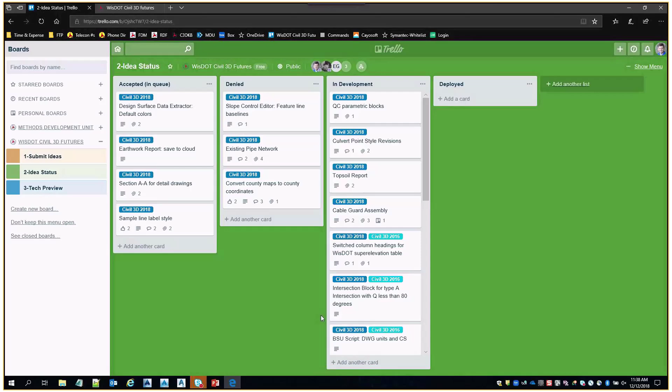The third board is the Tech Preview board. The Tech Preview board is a place for methods development to share previews of certain items under development. This board typically contains larger or more long-term development efforts. WisDOT Civil 3D Futures members can add comments to the cards and watch cards on this board. All other access is restricted, so you can't add cards or move cards.

The Scoping in Queue list contains items that methods development plans to work on soon. The In Development list contains items that methods development is actively working on. And the Validation and Testing list may contain downloads for you to try out if they are available. Each card might contain videos, documents, or test files for you to review. We encourage you to participate and provide feedback by commenting on the cards on the Tech Preview board.

We hope you find WisDOT Civil 3D Futures helpful for communicating with methods development and your fellow Civil 3D users. We encourage everyone to sign up and get started by watching the introductory video.

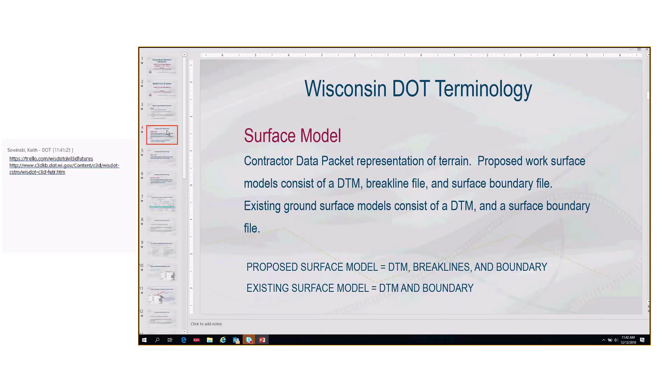For Wisconsin DOT projects and our design models, the term surface model is a representation of terrain in our contractor data packet. Our proposed work surface models contain a DTM, break lines, and a boundary, and our existing ground surface models just have the DTM and boundary.

The reason we don't include break lines with our existing ground surface models: if you've seen our purpose training for design models, you'd know we view our design models as a platform for contractors to build their models from, and it's the break lines that are most useful for them in those efforts. For existing ground, we don't want contractors building off of or changing existing ground. If they've identified any issues, we want them to come back to the department and we'll work out those problems together, so we don't have break lines with existing ground.

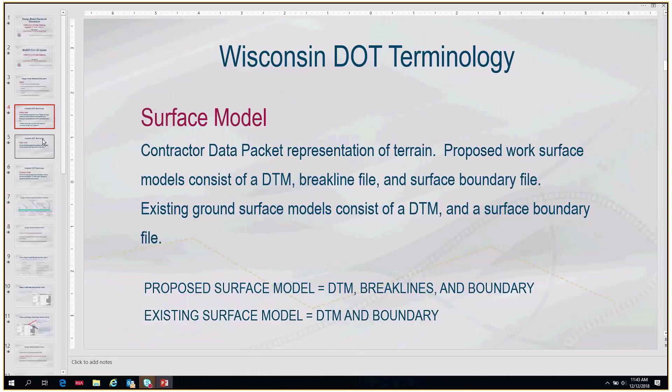The next term, design model, is the proposed work terrain representations in our contractor data packets. Our current delivery requirements have a top and a datum surface model that make up the design model. Datum, if you're not familiar with the term, is the finished earthwork model.

And the construction model is the model our contractors are using in their operations. On our projects, contractors are responsible for construction model development. They may choose to use design model information in developing construction models, or use our design model information as a QC platform to check their construction models. We've seen both of those types of workflows in our project environment.

Our design model implementation is not a new effort. We've been at this for a while, and the design model concept itself has evolved over time. We started out with goals for developing and deploying Civil 3D workflows that delivered what we were calling at the time a 100% construction-ready surface model. That was the original design model concept we started with.

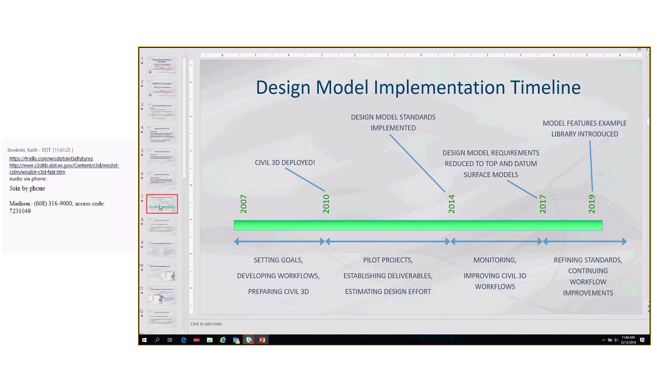But as time went by and we accumulated more project experiences, we started to recognize that the design model concept we started with was maybe not the best, most appropriate use of 3D design practices on our projects. It wasn't a single moment or a single project experience that led us to think that—it was really an accumulation of project experiences over time.

Anytime you're starting something new, you're going to have successes, but you're also going to have projects that maybe didn't meet all their goals, and we were encountering that. As we had conversations with project staff who experienced that, we came to understand that the design model concept we laid out maybe wasn't the best, most appropriate use of 3D design in our project environment.

So if that wasn't the design model for Wisconsin DOT projects, what was, or what is? We started refining the design model concept. We went through our first iteration of significant change last year, in 2017, by reducing the number of surface models we had. And now we're implementing something new, which we're calling the Model Features Example Library, that's going to further change and evolve the design model concept—and that's what we're going to be talking about today.

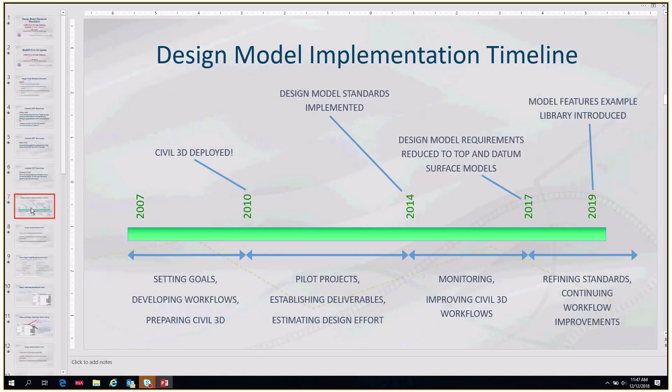With the changes we're proposing right now, there are 3 issues or goals that we think are achievable with this step. The first one we're calling right-sizing the 3D design effort for our projects. We currently have a one-size-fits-all type of standard in the FDM, and we have a full variety, a spectrum of different types of projects in our improvement program. Even with the improvement project type classification definitions, the needs of those projects are variable within a single improvement project type. So the one-size-fits-all concept we've been working with is really not as flexible as we need it to be. I'll talk about the second and third goals as we work through the presentation, but I want to focus on right-sizing effort first and how the changes we're proposing will make significant gains in that goal.

So this is more of an overview. I do have a presentation on the Civil 3D knowledge base that goes into much greater detail about how this standard would right-size our 3D design efforts. I'm going to be providing just kind of an overview look at that right now.

So really it's all about the design model features example library. Let's talk about what that is for a second. What it isn't is a library of full project examples. That's not what it's going to be. It's going to be small pieces of project model examples, pieces being commonly found roadway features that we see on our projects. So you'll see on this slide a list of the different types of roadway features that will be included in the design model features example library.

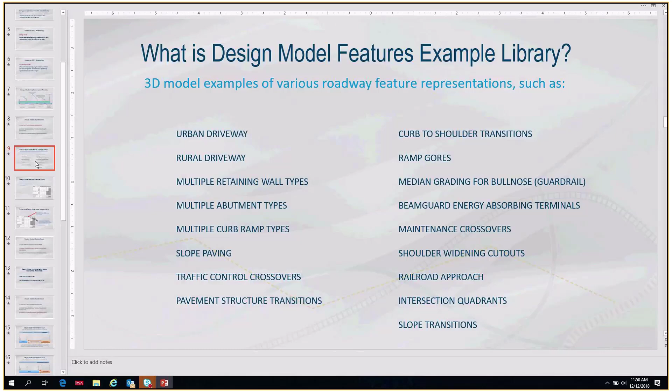This isn't the complete list. We have a larger list than this, and this is going to be a living document, so to speak, something we can build out over time. We're expecting we'll hear ideas from people about additional features we could include in the library. But this is a starting point to just communicate the idea of what we're talking about. These model examples will show people how to represent these different types of features in their design model deliveries.

So for each feature within the design model features example library—that's kind of a tough term to keep saying over and over, we've got to come up with a better name for that thing—but for each feature in the library, we're going to have a base level of detail example. That by default will be the minimum delivery requirement, the statewide delivery requirement for level of detail in a model feature. It will be less detailed than I think what people have come to understand as expectations for design models with our initial inception of it, the 100% construction-ready surface model concept.

Some of the features in the example library will have, in addition to that base level of detail, one or more advanced level of detail examples associated with them. So it depends on the feature, it depends on its purpose and how it's used in construction.

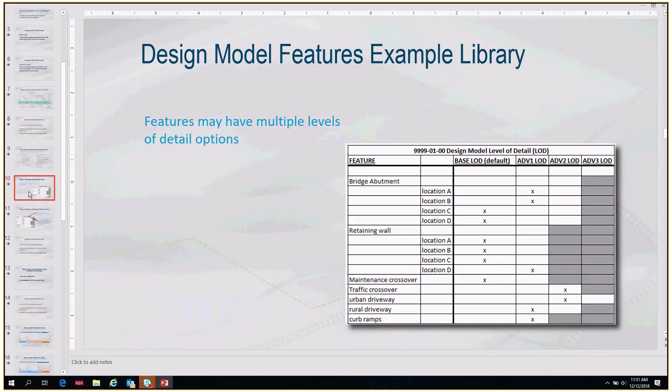The documentation associated with these examples for the base level of detail drawings is going to point out critical elements of that feature and how they're being represented and how that detail should be represented. We'll do that for the advanced examples as well, but that documentation for the advanced examples is also going to lay out what types of project situations that extra detail of an advanced level of detail would benefit—what kind of project situation would benefit from an advanced level of detail. So that documentation will be included in the model example library, and it's going to be part of how this is put into practice and part of how we're making everything work here.

So the way we see this being put into practice is, again, that base level of detail example is going to be lower detail than I think what a lot of people think of today for a design model expectation for delivery.

And we'll have a summary sheet of the full example library concept.

What we see happening is at the project level, in the region offices, project teams will have an opportunity to develop a design model scope for their project. If they do nothing, then by default the delivery requirement would be the base level of detail for the different features shown on that project. But they have opportunities to advance level of detail in certain areas where the project situation would benefit from that, and the guidance material will help people understand when they might want to consider doing that.

So the level of detail for a design model scope won't be uniform across a project. It'll be a feature by feature consideration, and it doesn't need to be uniform for a specific feature either.

Let's say we have a reconstruct project where we're going to build 3 bridges, and these 3 bridges have 6 abutments. The project team might decide that 5 of those abutments, the base level of detail design, is sufficient for that situation. But on that one abutment, maybe we're in an environmentally sensitive area, or maybe we have a lot of tight constraints and activity happening, especially with traffic being maintained - whatever the case may be, they can elevate the level of detail for that single abutment.

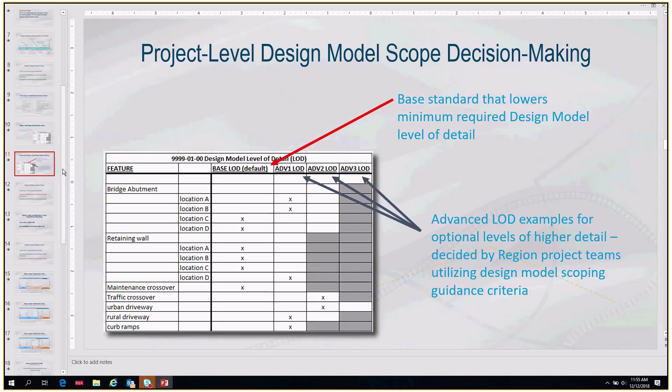Our second goal is improving communication of design model delivery expectations. We do have design model standards today - they're in the FDM. And we're communicating delivery expectations with articles, written text and 2D diagrams. But the concepts that we're trying to communicate in written text and 2D diagrams are more complex than that.

Where have we heard that before? That's the whole purpose we're doing 3D design, because our specifications and our plans convey design intent and project concepts, but the 3D deliveries convey even more information. Well, the same situation exists with our standards. So we think that providing 3D examples in the form of models is going to help us really improve people's understanding of what delivery expectations are.

So that weak definition of today's standards, just using text and 2D diagrams, has been affecting us a couple of different ways. Level of detail uncertainties has certainly been an issue on our projects since we've implemented design model standards. Designers have wondered, have I done enough? Is there enough detail here? How do you really know? And that uncertainty has been compounded because it's really been a moving target.

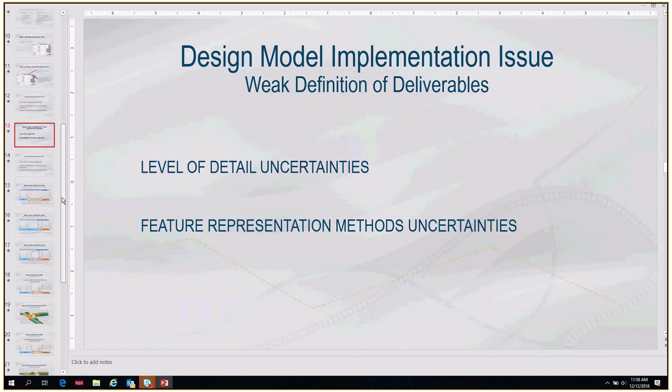Our third goal, the way I've been describing this, is the overextended role of roadway design.

Excuse me, I have a sinus infection here today, so if I sniffle, I'm sorry. I'm sure it sounds horrible over the audio feed.

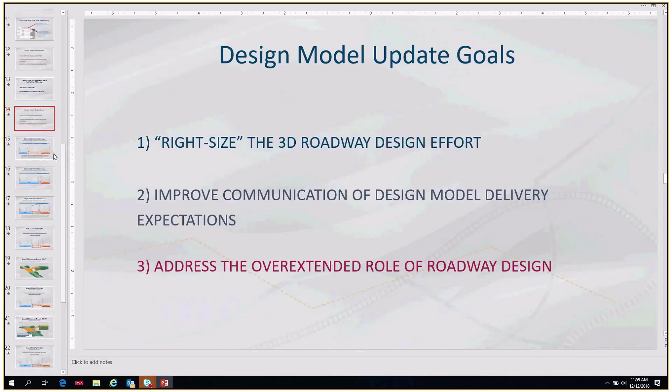Before we were doing 3D design, we developed roadway geometry information in the design process. We start with alignments and profiles. We get as far as cross sections, and that was sufficient in that project flow for communicating design intent. But it wasn't the definition of the full geometry of the roadway, right? There was a lot of missing information that needed to be resolved in the construction of that roadway.

And in that classical project flow, how that was occurring was contractor staff would interpret design intent. So I'm going to call that the design intent interpretation gap. Sometimes that interpretation was happening with the assistance of our engineering staff out in the field, but primarily it was contractor staff: equipment operators, the grade man, sometimes the foreman, utilizing the information in the plan and interpreting it to add the extra detail so that the project could be completed.

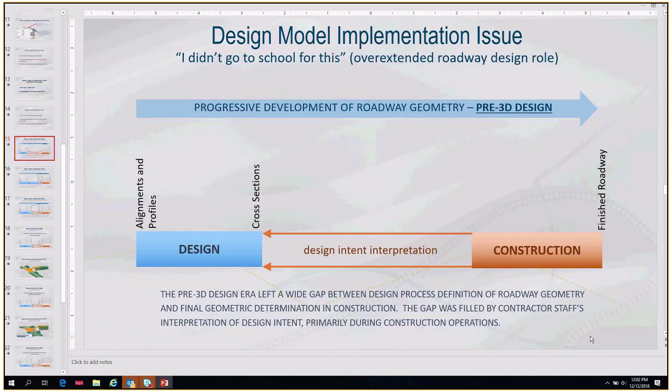And over time, as we accumulated more and more project experiences, you'll see on the title of this slide, I got a comment there in quotes. I mean, I literally heard those exact words multiple times as I was out talking to people over the years. And I understand that sentiment, and that's really what our correction here is all about.

I didn't go to school for this, and what that means to me is we've extended roadway design beyond the engineering work. And the term that I've been using a lot to describe this is virtual design construction, or virtual design. We pushed roadway design into that virtual design construction area with the 100% construction ready model concept.

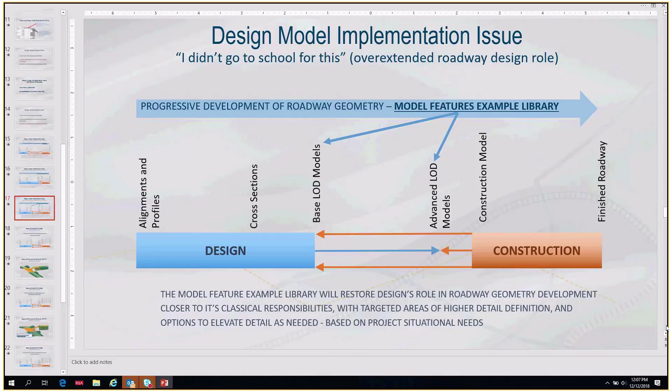So really the proving out of this concept is really hinging on how we define base level of detail, right? Because that's going to set the statewide minimums. And we've developed some concepts, I'm going to call them guiding principles, that are going to help us through these decisions.

These aren't absolutes, right? So these are just guiding principles, but we're balancing that against other factors too. Certainly we're not going to have a blind eye to design process impact. So we're going to balance construction project need and other factors in this, but these principles are going to help us in the decision-making process, and I think that'll start to make more sense as I walk through these a little bit. So the first one, I already talked about this quite a bit.

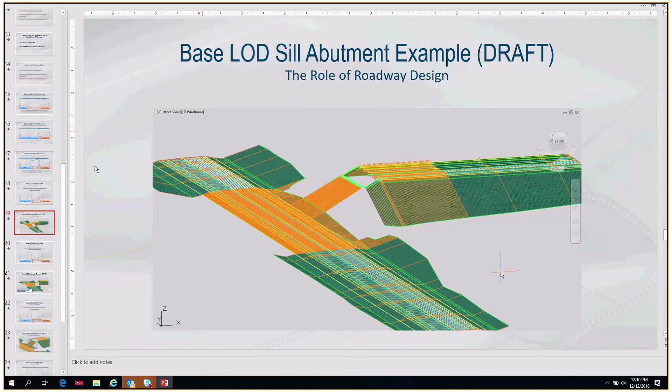Another guiding principle. We want to require the detail that has high communication value of engineering design concepts, and we want to include that in our base level of detail requirements. That sill abutment example has one that's a pretty good representation of that concept.

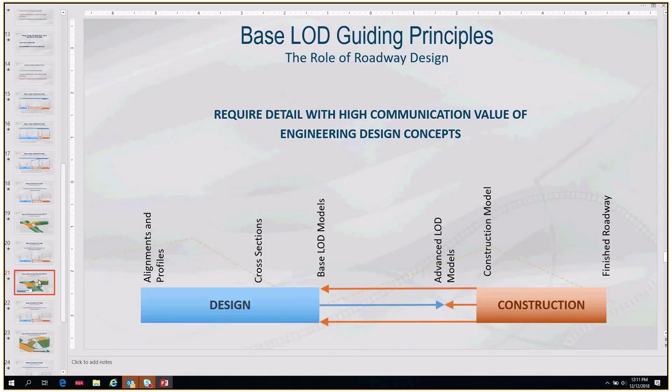That clear zone area from the roadway underneath needs to transition where it's starting at the shoulder and going up at a 3-to-1. It needs to transition slowly down to a full ditch section as it works its way away from the bridge area. So as it does that, there's geometric rules. Everybody's familiar with our design standards, and there's geometric rules associated with that transition, right? We're concerned about things like traversability, so that errant vehicles can pass through these areas safely, let's just put it that way. And we have other geometric rules there as well.

This one is kind of variable depending on the roadway type, but there's longitudinal slope gradient maximums within the clear zone as well. And so this one I'm making some assumptions. I'm assuming this is like a rural high-speed 2-lane highway. So the appropriate maximum longitudinal slope within the clear zone area there would be a 10-to-1 slope. And so that's what we're showing here, this clear zone from up at a 3-to-1 transitioning at a 10-to-1 slope down to where the clear zone elevation would be in a ditch section.

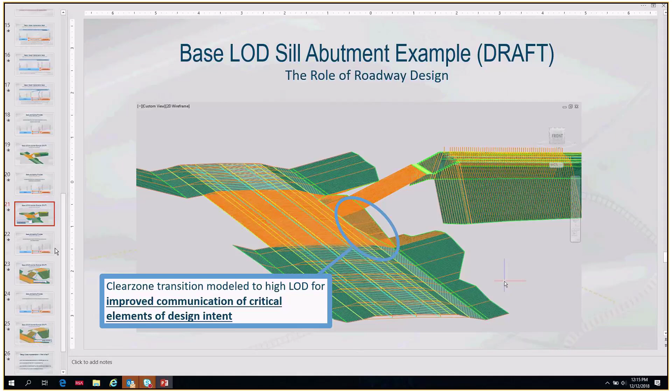Another guiding principle in developing our base level of detail model examples is that we want to require the detail that's going to benefit the construction project, but we want to option the detail that'll benefit design. And that kind of makes sense, right? Because as designers, we have design delivery budgets, right? And timelines, and sometimes we're feeling delivery pressure to complete our work. And if a detail element isn't going to benefit my design work, I may not include it in my design delivery. But if it's going to benefit the design process, I'm much more likely to do that, or at least I can make an informed decision because I know my design process best.

I know my design situation, and I can choose whether or not I want to invest and put that extra detail into my work because I'm the one that's going to benefit. So that's where we want to option that. But if it's not really benefiting design, or maybe it's costing more effort in design, but it benefits the project as a whole because of the construction project benefits, we're going to require that. Now, again, these are principles, general ideas in the decision-making process, right? We're not just doing this in the absolute sense.

So there's other factors that we weigh into that, and obviously the impact on the design process is something that we need to weigh in, right? We don't want to spend 5,000 hours in design to produce something that's going to save us $5,000 on a construction project. I mean, that's obviously extremes there, but we're factoring in other things too. It's not an absolute rule that we're dealing with here, but it's a concept that's helping us make these decisions.

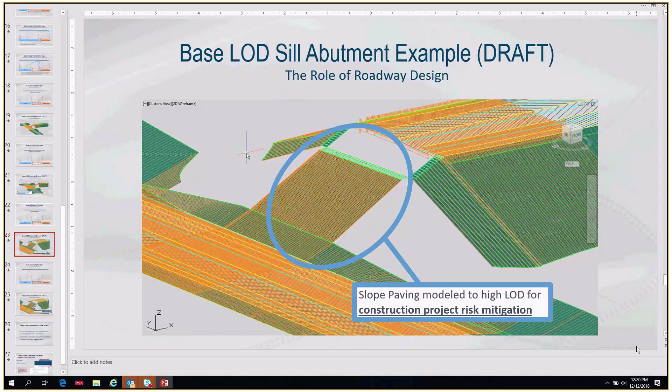So, if you think about it for a second, the clear zone, that 3D line that's representing the clear zone along the bottom of the slope paving, that's just a function of the alignment and the profile and the cross-sectional geometry that we're putting in our assembly to resolve that clear zone line. And then we know exactly where we need to be at the abutment. So it's really just targeting between those two things. It's really low level of effort on the design side, but really significant construction project benefits in the form of risk mitigation.

Now I don't have an example to show you here that depicts the other kind, but I'm going to jump back to an earlier slide. I said we want to option detail that benefits design, right? We want designers to decide then if the benefits are on the design side. And the example that I'll choose to convey that idea is curb ramps. So curb ramp models aren't used in construction.

That construction operation, at least in today's world, is not model based, not on our projects anyway. And our required deliverable for curb ramp design is a construction detail drawing. And that's appropriate considering the construction operations, the way things are happening today. Some of our designers would tell you that the most effective, efficient way to develop an ADA compliant curb ramp design concept, or pedestrian facilities design concept, because it's more than just a curb ramp, right? Some of our designers would tell you that a model-based workflow is the most effective way to do that.

And we have Civil 3D training that teaches people how to do that. And then with the intelligent automated labeling that we get in Civil 3D, it's a really efficient pass-through from the model that they may develop using a model-based design process to the plan sheet. With these labels, we can produce construction detail drawings, and the QC is pretty reasonable too, because we can see the design concept with the model. We have direct linkages to the plan content, the elevations.

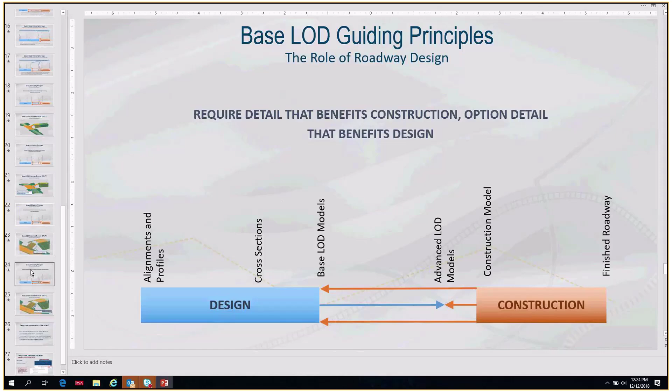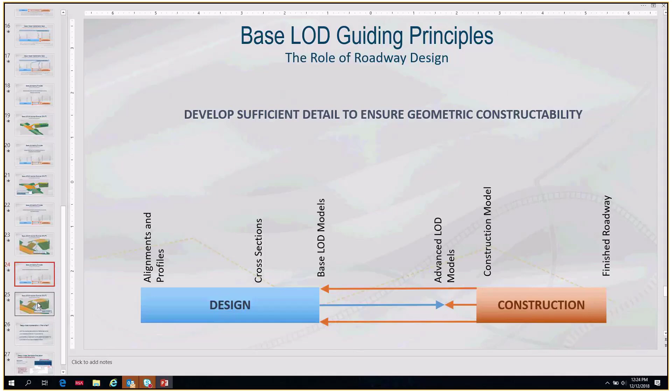Now, if that was a real design situation, what would you do? You'd just slide that clear zone transition further to the right, which would flatten out that slope, and you'd do that until you achieved your 2-to-1 slope all the way around, checking as you go with those quick measurements.

But we don't have to resolve all the converging geometric elements to their exact correctness in design to do these constructability checks—we can do it just by measuring in Civil 3D. So where we see these opportunities to ensure geometric constructability, we'll factor that into our considerations, because that's where some project issues have popped up in the past, pre-3D design, with the cross-section delivery, the traditional project flow. That's one of the benefits of 3D design—being able to ensure geometric constructability. We're going to look for those opportunities and factor that in as well.

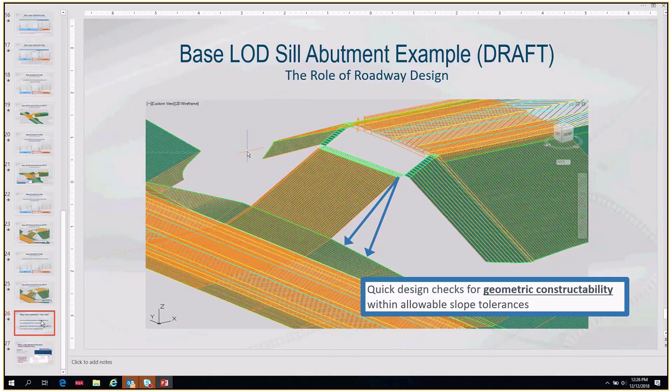So our process, how are we going about this? We're going to be developing model feature examples incrementally, releasing them as they're ready. It's one part developing the model itself and the geometry—there's some thought behind that, as you're probably understanding through our presentation today—but then there's the documentation associated with it too.

We're going to release those incrementally, and they'll be in what we'll call a draft status. We're hoping to get the industry's attention here, both the roadway design community and the construction industry, really any stakeholders interested in this process who want to get involved. We want to make sure that opportunity is available to them. As we go through the process of commenting, questions, and our responses, these examples will eventually graduate from draft to what we're calling a guidance status.

Guidance status is going to allow us to achieve all the benefits I talked about today. The design model concept, the model features example library implementation—it all fits into today's FDM standards. We don't need to change our design model standards in the FDM to implement this. What we're really doing is better defining it, creating a much stronger definition and communication of what design delivery expectations are. But the delivery requirements themselves in the FDM, we'll have to make sure everything's consistent—though in a fundamental sense, everything we're talking about today fits within today's FDM standards.

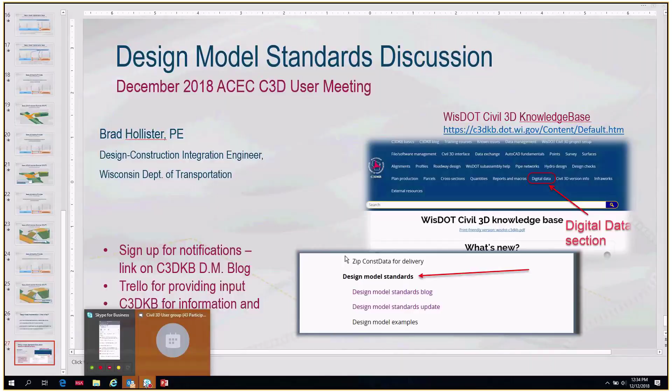The question is, are these changes going to be communicated to contractors as well? Most seem to still expect 100% design models. That's a great question, Sarah. Thank you.

Yes, we've had opportunities through different channels to talk to contractors. We've worked with WEMA and WTBA, and had a representative group from the contracting industry volunteer their time with us for several rounds of engagement. We haven't put this specific topic to that group directly yet, but we intend to. We also have a standing place on our Grading, Landscaping, and Sewer Committee, made up of that group of contractors plus department personnel, discussing policy issues. I have a standing place on their agenda, which is an opportunity for that industry to provide comment to us.

I'm also going to be directing our contractors, if they're willing, to use those same communication methods, through Trello and whatnot. So if they want to provide input on a specific model example, they don't have to wait until we have another meeting at their office or wait until the next time they get to talk to us. They can go that route, and we'll have the same other opportunities available too.